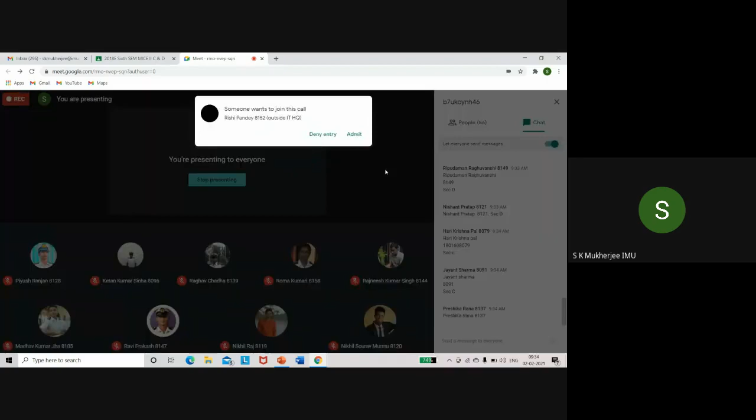What is more strict is getting placements. They are being so tough on the boys, unbelievably tough, and they almost tell you they don't want to take boys. It's like that, because the whole process of putting a boy on the ship and taking off somebody from the ship has become very, very tedious and very expensive for the company also. 14 days quarantine - during that quarantine he will have to be paid, he will have to be taken care of, and any medical test that has to be done at the company cost.

So these things are very costly for the shipping company. So they are trying to prolong the people who are on the ship, so that the stretch of time that a seafarer does is much longer, so ultimately the cost comes down. So they are finding all the means of cost cutting. So in the process, there are delays of getting on the ship, there are delays of getting off the ship.

And the funny part is those who are on the ship, they are desperate to get off the ship, and those who are on shore, they are desperate to get on the ship. It's a very funny situation - with the boys who want to get on the ship, they can't get, and those who want to get off the ship, they can't get off.

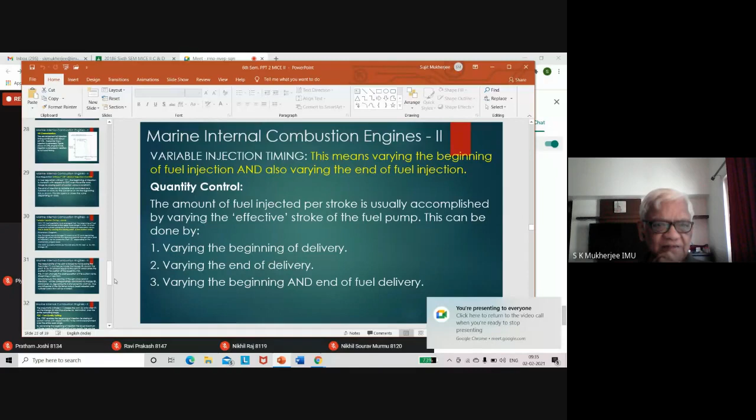So we were on page 33, as he says. Yeah, this was the diagram.

This was the diagram to show you how variable injection timing was achieved on the Sulzer valve control type of pumps. In the variable injection timing, you need to vary the beginning of injection as much as vary the end of injection. Varying the beginning of injection is the time at which the fuel is injected, and varying the end of injection is the quantity of fuel that is being delivered for the injection.

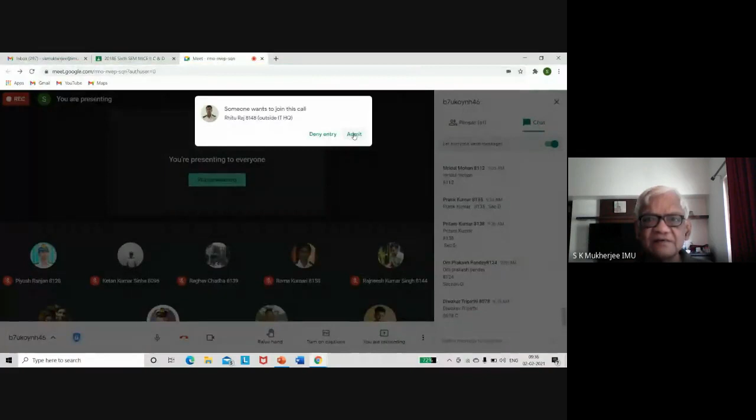So these are the two main issues. I will show you a diagram, which I think is a simpler diagram. Let's make it a little bigger so that you can see it better. Now here it is.

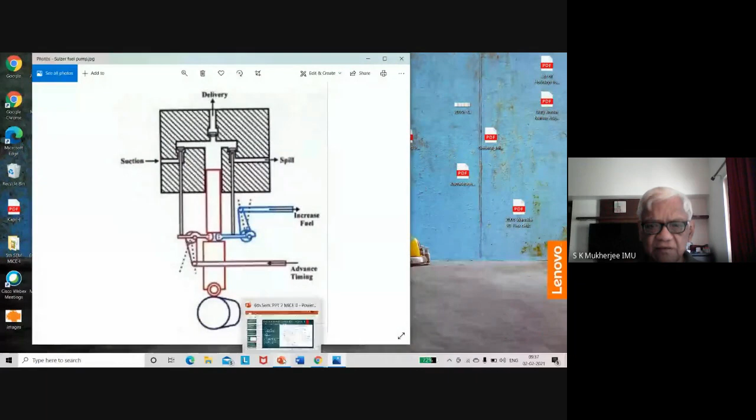Okay, some fellows coming to the class. Indrajit Moitro, he's always late. It is 9:37. Another 3 minutes, and I can't keep waiting for you fellows.

So, where was that diagram? It caused me a lot of confusion. Yeah, this is the diagram which I took from the net, but it is very elementary in its display. See, at the beginning, the suction valve is on the left side, and the spill valve is on the right side.

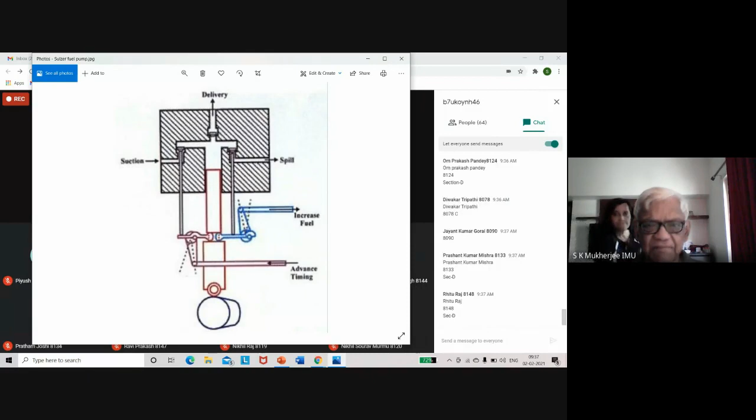Divya Prakash. Oh, who's this fellow? Just a second. Hello, Divya Prakash. Yes, what is it? For what? Laurel, so I have already sent all the names that have gone.

See what is wrong and right. Don't send me wrong lists because I will forward the wrong lists. I don't have.

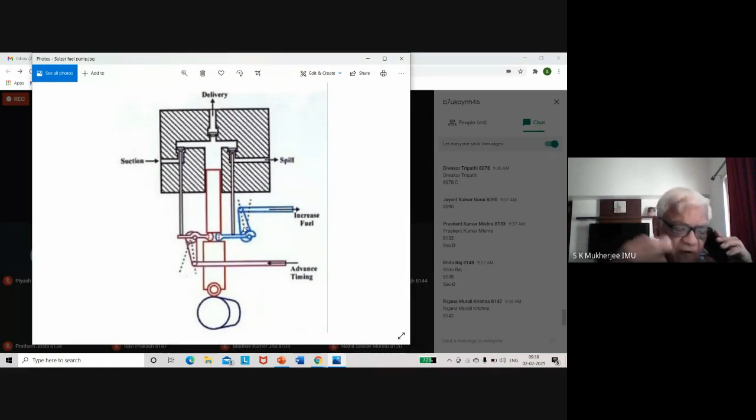See, it's the placement committee that is sending me the list, and I have to trust the placement committee. You all make a mess over there - it means I also make a mess. And now I have forwarded already to Laurel Ship Management, and it is up to them now. Whatever they decide, I have to abide by that.

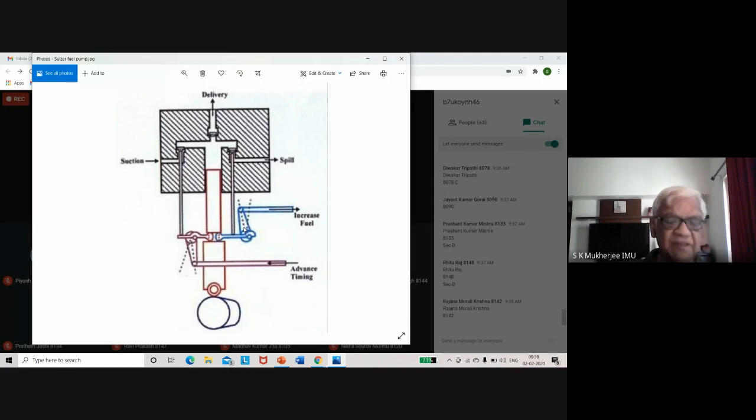They send all the - see, your placement committee has to be very, very efficient. They make a mistake means I also make a mistake. You send me a wrong list, I forward that wrong list. I don't have the scope to inspect that list in detail.

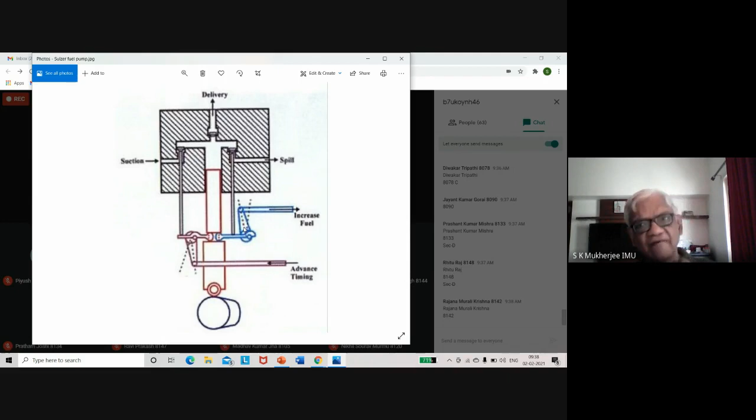That is why you have a placement committee which makes these lists, which identifies the boys who are going to be provided an opportunity. So you have to be a little serious about this. Don't send random lists and think your job is done, and then realize you have made mistakes.

Because what list I get, I have to trust the placement committee. And based on that, I send it to the company. And I can't keep telling the company, sorry, I have made a mistake, please correct this. Again after some time, no, that list was also a mistake and I have to amend that list. Where does it leave us?

What sort of institution are we if we keep making mistakes and telling the company it is not right, please amend the list? So once you send a list, it is final. Don't ask me to keep amending my statements to the shipping company. I lose respect, the whole institution loses respect.

And more than that, your boys become unreliable. All the students become unreliable. So be sure that the placement committee, when it does a job, does it very, very thoroughly.

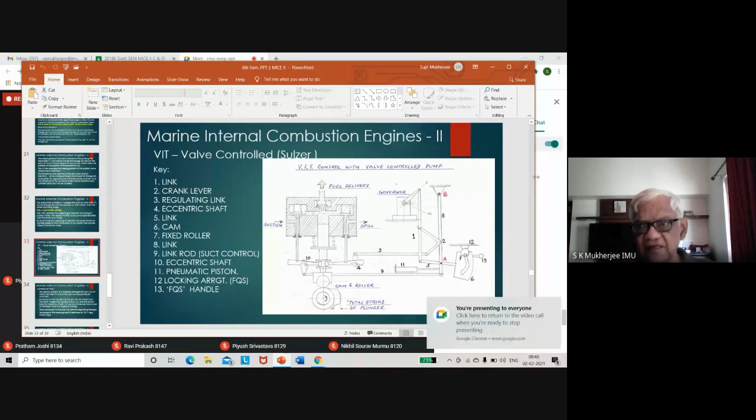Because what the placement committee gives me is what I forward to the shipping companies. And my interaction with the shipping company has to be at a certain level where there is trust. And if this level of trust is not there, they will stop coming to campus. It is very, very important, which some of you don't seem to realize.

They keep making mistakes, keep sending whatever they feel like, and then realize there's a mistake. So anyway, that is another point. Let's get back to our subject.

So I was explaining to you how variable injection timing can be achieved by adjusting the beginning of injection as well as the end of injection. So here you have a diagram of the same pump that you saw earlier. In the earlier diagram, you had the suction side fulcrum in a fixed position, whereas the spill side fulcrum was movable, thereby changing the timing at which the spill valve would open and thereby controlling the quantity of fuel being delivered. So this is not enough to ensure the best response from an engine in terms of fuel economy.

So what we have now is the fulcrum of the suction valve opening is also changed as much as the spill valve. And this is achieved by the governor through one arm here.

Okay, now if you have a look at the diagram, let's follow this diagram. I have the procedure also written down for your convenience when you happen to read it. First, let me explain to you firsthand how this leverage mechanism works.

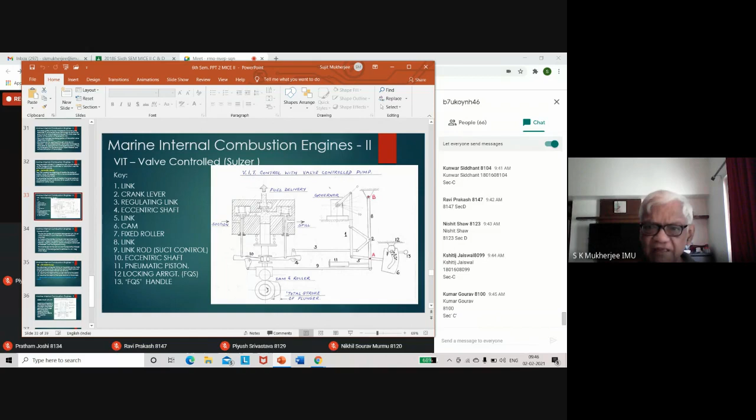In other words, the pin will move only in the slot, but the pin is fixed and the cam is moving upwards. So to follow the slot, the whole cam is going to move towards the left.

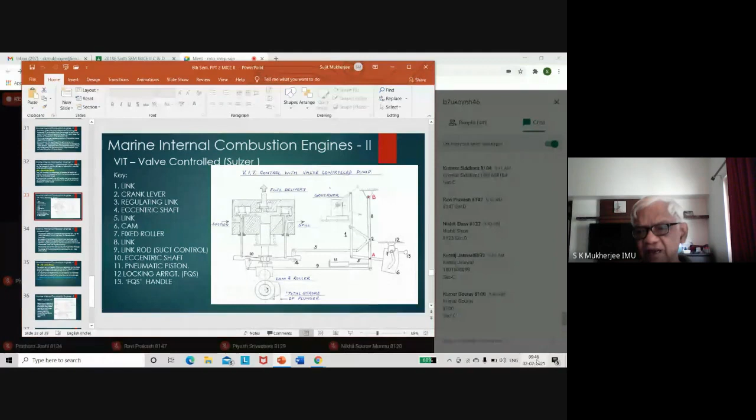No, sorry, I will not admit him. He's coming at 9:45, 9:46. No admission for this fellow. Who is this? Hasib Ali. No admission, not allowed, okay.

So when this cam moves upwards because of the force of the lever down over here, it will try to follow this slot. So this pin will actually push the cam to this side because the pin is fixed, the pin will not move, but the cam is moving upward.

So the tendency of the cam will be to move towards the left. If it moves towards the left, it means it will be pushing at the point where the hinge is, at B, and it will rotate. So the whole lever number 8 is going to move towards the left at the bottom while it is hinged at point B. Once it moves towards the left, it is going to move the eccentric at 10, thereby controlling the fulcrum which operates the suction valve.

So you see, with one movement of the governor arm, your spill valve is also controlled and your suction valve is also controlled. That means the opening and closing of the spill valve and suction valve are both controlled by the movement of the governor. So these are the functions of the levers.

You also have a pneumatic piston over here. This pneumatic piston keeps a pressure on this link number 8. Why? To keep it steadily fixed in one place. Otherwise, there will be some amount of rattle - it will sit moving around wherever there are clearances along the pins and hinges, it will tend to move about.

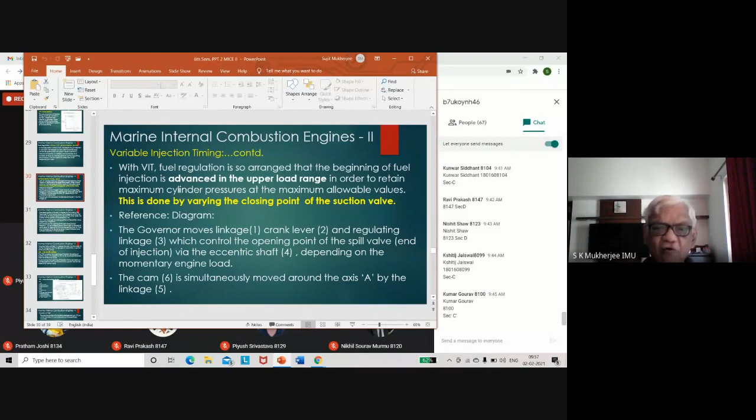So, in reference to that diagram which I showed you just now, you remember the governor moves linkage 1, that is that vertical link. And that vertical link was moving the L-shaped link, which was crank lever 2. And then regulating linkage number 3, which was controlling the eccentric for the spill valve. So 1, 2, and 3 are the three levers which control the spill valve, via the eccentric shaft 4, depending on the momentary engine load, whatever load is there at that point of time.

Okay, now because of this movement, cam 6, which is that rectangular plate like a cam, is simultaneously moved around the axis A by linkage 5. Moment lever 1 goes down, because it is hinged to linkage number 5, it will swivel. And because it swivels, the cam will go upwards, moved around the axis A by linkage 5.

Here is the diagram again. The moment number 1 is moved downward, it will initially move the L-shaped lever to cause link number 3 to operate the fulcrum of the eccentric to move your spill valve. Simultaneously, lever 5 will move downwards to cause the cam to move upwards because it is hinged at A.

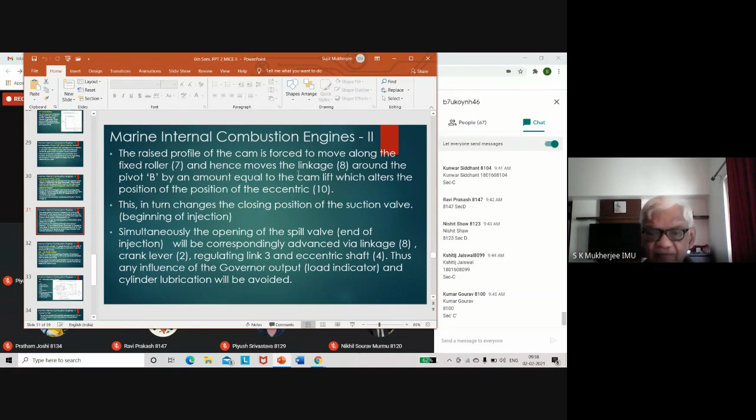Okay, so, because it is hinged at A, linkage 5. Next is the raised profile of the cam. What is the raised profile of the cam? You see that slot over there has a raised portion in the middle of the slot.

This raised profile of the cam is forced to move along the fixed roller 7 and hence move linkage 8 around the pivot B by an amount equal to cam lift, which alters the position of the eccentric 10.

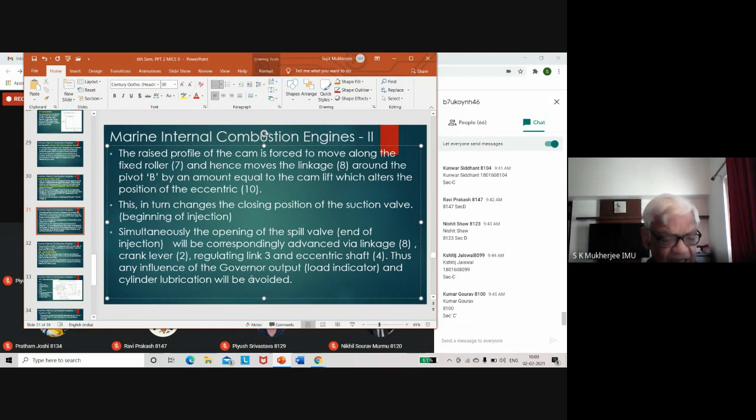Okay, that is the suction valve. This in turn changes the closing position of the suction valve, that is the beginning of injection. Simultaneously, the opening of the spill valve, end of injection, will be correspondingly advanced via linkage 8. You see, if you advance the suction valve, the linkages are so connected that even the spill valve will be advanced in its closure. So the entire process of advancing is done at the higher load range.

So if you remember that circular diagram showing the timing diagram of a two-stroke engine, which says 5 degrees before TDC fuel injection commences, 15 degrees after TDC injection stops. Now, if I advance this 5 degrees to 8 degrees, I will have to advance the 15-degree cutoff line to 12 degrees.

So from 8 degrees to 12 degrees after will be the injection period for full load condition, because the quantity of fuel ultimately being delivered has to be the same at full load. Only thing, the whole timing has been changed from 5 degrees and 15 degrees to 8 degrees and 12 degrees. The duration for which the fuel is delivered is the same as per the crank angle.

Okay, so that is what he is meaning here. Simultaneously, the opening of the spill valve, which is end of injection, will be correspondingly advanced via linkage 8, crank lever 2, regulating link 3, and eccentric shaft 4. Thus, any influence on governor output, load indicator, and cylinder lubrication will be avoided.

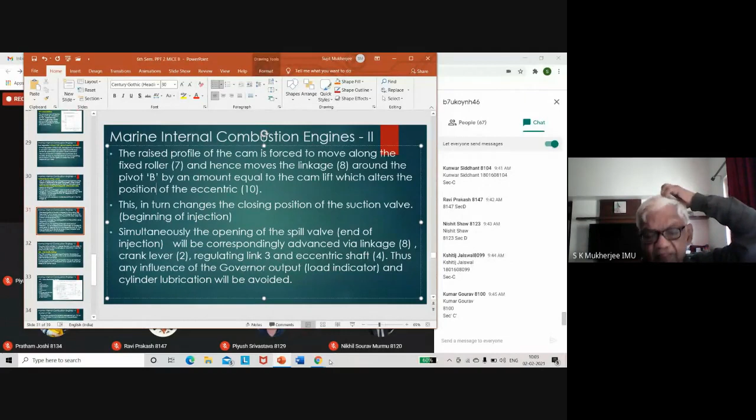So if I were to ask you a question, let me put this up as a question. Suppose the ship is fully loaded and it is running at 100 RPM. The propeller is running at 100 RPM and it is going on its voyage. It is definitely, something is burning.

I think they are making toasts in the kitchen.

Anyway, so what I'm saying is, suppose the ship is loaded and its propeller is running at 100 RPM, and it is consuming a substantial quantity of fuel, isn't it? The piston is moving in the cylinder liner at 100 RPM, at a rate relevant to 100 RPM. There is cylinder oil being fed into the cylinders for lubricating the piston and the liner at a certain rate. Okay, at 100 RPM, and the ship is loaded and it is moving.

Now, when the ship reaches the port and it discharges all the cargo and it is on ballast, that means it is as good as empty. But to keep the ship stability, you fill up some tanks with water so the ship goes down a little bit and it is stable. That is the whole idea of ballasting a ship. So now that ship is going to return or go to our next port, and it is again going at 100 RPM of the propeller, but it is empty.

Piston movement is the same speed because it is running at 100 RPM. So Kumar Gaurav, tell me, will the quantity of cylinder oil being consumed be less or more, or will it be the same or different? He doesn't know.

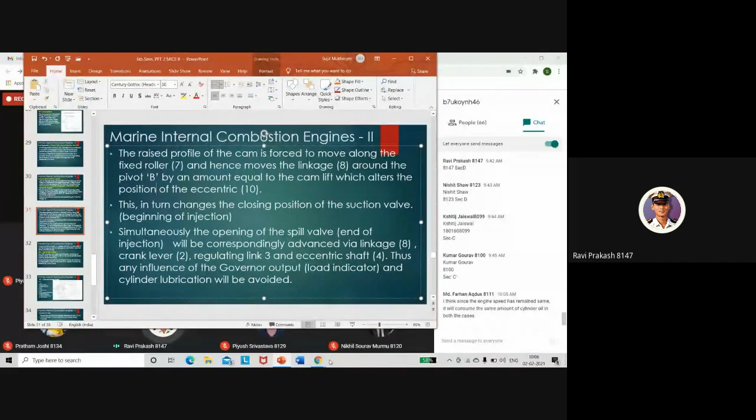Now this is the mistake. I will not say 90%, but a large percentage of the boys make this mistake. No, it will not be the same. You see, cylinder lubrication, why is it provided? For mainly two reasons. One is the frictional condition has to be reduced, so you provide lubricating oil. The second reason is the fuel oil, which has got some amount of sulfur.

So that sulfur quantity will vary depending on how much fuel you're burning for each stroke. When the ship is loaded, the load on the engine is more, which means the fuel being supplied will be much more as compared to the amount of fuel being delivered when the ship is empty. It is doing much more work carrying that whole cargo. It is doing very little work when it is empty.

So to push a heavy weight, you need more energy. To push a lightweight, you need less energy. So the quantity of fuel consumed during loaded condition will be much more than the quantity of fuel consumed when the ship is empty. That everybody understands, I hope.

Ravi? Yes, sir. Okay. Now, the quantity of lubricating oil supplied is for two reasons: one is to reduce the friction, and number two is to overcome the acidity that arises from the sulfur. If you burn more fuel, you generate more acid. And if you generate more acid, you need more alkali to neutralize that acid. So how can you give more or less alkali into the cylinder? By injecting more or less lubricating oil.

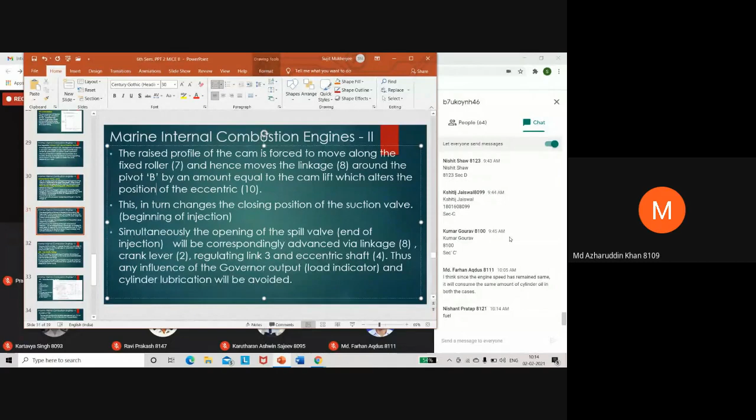No, over here we are not reducing NOx, we are running a normal engine. When you burn at low load it will condense? No. The reaction of H2 and O2? No. Combustion? Azharuddin Khan, you are near the answer.

You see, what is fuel? It is a hydrocarbon. So when this hydrocarbon burns, what does it give off? It basically gives out HC - hydrocarbon. So the C becomes CO2 or CO, carbon monoxide or carbon dioxide. And what happens to the H? H combines with the oxygen to form H2O.

So whenever fossil fuel is burned, whenever you burn wood or oil - any fossil fuel, which is a hydrocarbon - you're also generating water, but because of the heat involved it comes out as water vapor. This vapor is the source of water that combines with sulfur dioxide to form acid inside the combustion chamber. That is why this acid has to be neutralized, and it will react with the walls of the cylinder liner, the piston, the crown, all these parts.

So to avoid it, we use cylinder lubricating oil, which reduces friction between the liner and the piston rings, and also spreads a layer of alkali. This alkali, when it comes in contact with the acid, neutralizes it to form salt and water. Okay, Jaiswal has a question - once again please.

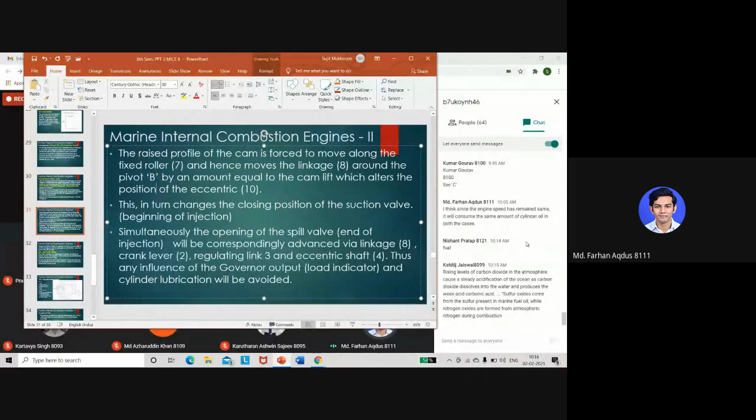This concept, when the fuel burns - fuel is basically a hydrocarbon, meaning there are hydrogen and carbon molecules within, let's say methane, so it has got CH4. The carbon burns into carbon dioxide or carbon monoxide. Hydrogen combines with oxygen to form H2O, that is water. This water cannot come out like water because it is hot, so it goes off as vapor.

So this vapor, when it mixes with sulfur dioxide gas, it forms sulfuric acid vapor, which reacts with the surface walls of the cylinder liner. But if the cylinder liner is coated with oil which has alkali in it, this alkali and this acid, when they react, will form salt and water. But this water which is formed again is in the form of vapor. So what goes out from the funnel is actually vapor and gases.

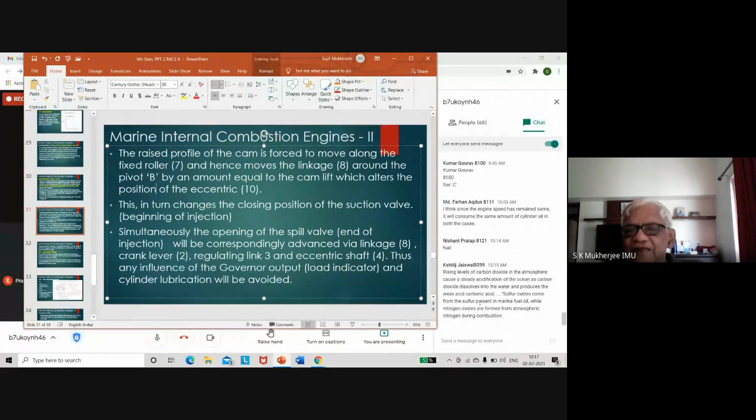Rising levels of carbon dioxide in the atmosphere cause steady acidification. Dissolved in water it produces the weak acid, carbonic acid. Sulfur oxide comes from the sulfur present in the fuel oil. Carbon dioxide, nitrogen dioxide, sulfur dioxide - this is what is killing us, and that is why the whole planet is under a lot of stress. Kshitij Jaiswal has brought out the real core of all our universal problems. We are killing ourselves, and that is why we have to get rid of using fossil fuels.

And if you see Elon Musk, he is one of the champions in the world. He's going to be a big hero, so he is going to do away with fossil fuels. And every attempt is being made to reduce our dependency on fossil fuels.

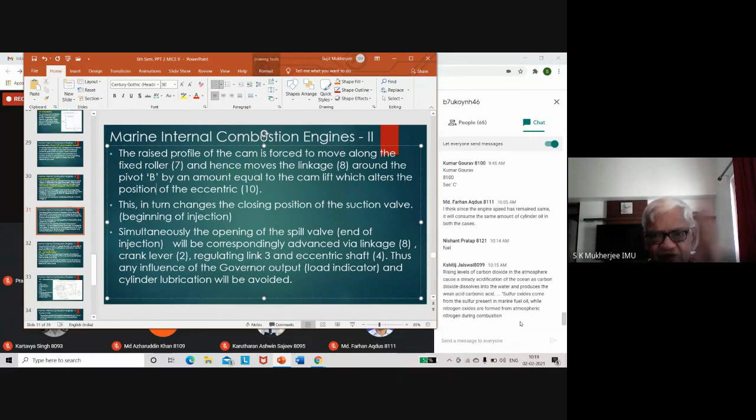Maybe you boys can think of some ways to avoid using carbon. Carbon is the main problem - carbon footprint - it is causing damage to the entire planet. So this carbon should not be used for any combustion process. But all our fossil fuels are carbon - whether oil, wood, or coal, they all contain carbon. Once you burn carbon, you get carbon dioxide, and when discharged you get carbonic acid, as Jaiswal already told you. Similarly, nitrogen oxide gives nitric acid, and sulfur dioxide gives sulfuric acid. So all these acids will ultimately kill us, and we are killing ourselves gradually. It is called gradual suicide - we are committing suicide.

So the pressure is on to stop using fossil fuels and use alternative sources of energy like solar energy, or hydrogen as a source of energy. But to produce hydrogen, you have to burn fossil fuel, and then you use hydrogen thinking you're safe. But ultimately you've already done the damage by burning fossil fuel to generate the hydrogen. That also has to be stopped.

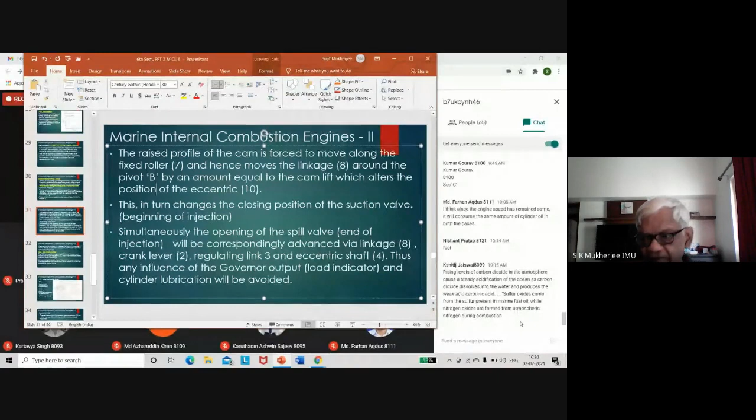Anyway, we are going off the topic. Let us finish our subject, the next chapter is coming up soon. Jaiswal, now don't change the topic, otherwise we will not finish our syllabus. Okay, where were we? We went off topic. I hope you have understood the last point, sir.

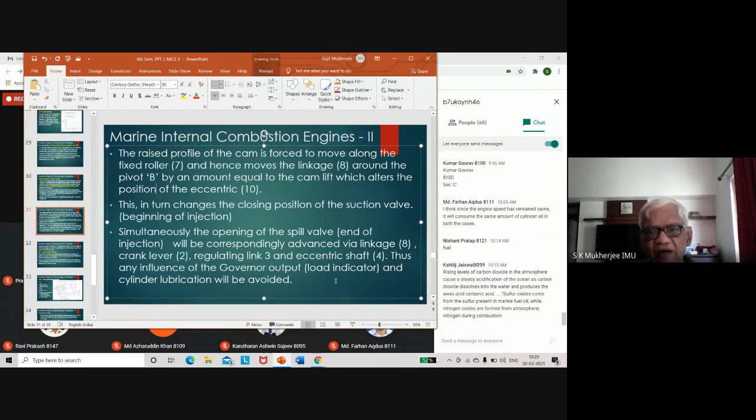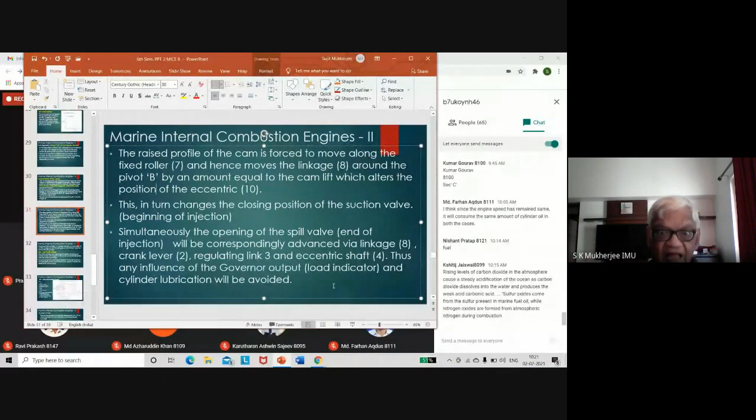Simultaneously, the opening of the spill valve end of injection will be correspondingly advanced via linkage 8, crank lever 2, regulating link 3, and eccentric shaft 4. Thus any influence on the governor output, load indicator, and cylinder lubrication will be avoided, so the load indicator remains in a steady position though the injection timing has changed. That load indicator is a lever which ultimately controls the quantity of cylinder lubrication also. So though injection has been advanced or retarded, cylinder lubrication remains static as required for the quantity of fuel burned on every stroke of the engine. This will become clearer when we cover cylinder lubrication.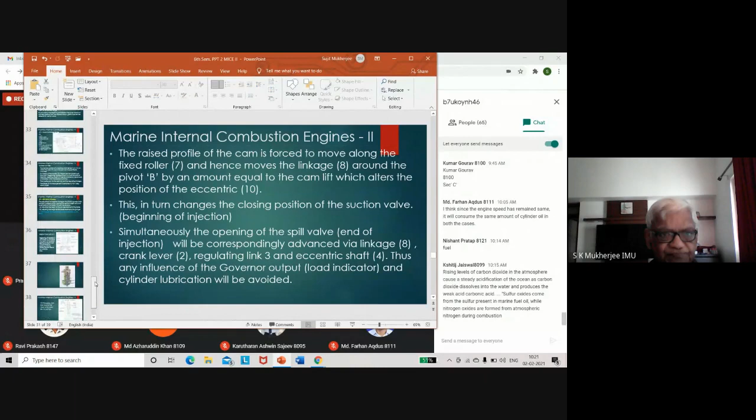Next, the pneumatic cylinder presses on cam 6 onto roller 7 via linkage 8, and thus ensures no lost motion over the entire actuating angle - that means it doesn't go rattling from side to side.

Okay, that is the purpose of that pneumatic cylinder with the pneumatic piston inside. Next, what we have is called the fuel quality setting. And this fuel quality setting has everything to do with that lever number 13.

Fuel quality setting enables the beginning of injection, that means the closing of the suction valve, with respect to TDC, to be advanced or retarded over the entire load range. That means whatever the governor can do to advance the fuel injection, the fuel quality setting allows for additional advancement, and it is the prerogative of the chief engineer.

And that lever is actually locked with a lock and key. So the chief engineer has the sole propriety of further advancing the injection if he feels that the peak pressures are not coming up even at the reduced load condition. So he will try to get the maximum load even at the reduced fuel setting.

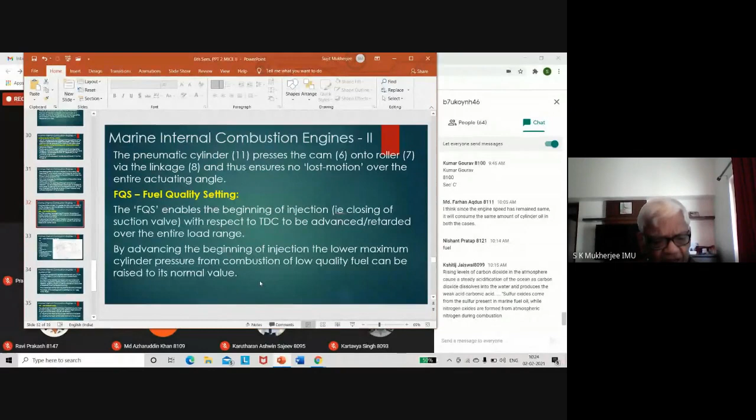The last condition which may cause the engine to perform badly, and very often that is the condition, because we are burning cheaper and cheaper fuel, is the quality of the fuel. And that quality of the fuel means how much you will be stressed out on the ship.

Okay, let's go to the next plate. So this was the diagram.

You will need to practice this diagram 2 or 3 times. But after you understood the working, drawing the diagram from memory is a breeze. That will be the case. I know some of you are capable, and you will definitely do it after one practice shot. You do it and you get it.

So in the exam, if you are asked to explain VIT and any jerk pump, on how VIT is achieved, then you can draw this diagram or you can draw a Bosch pump.

Let's read on what is the function of FQS. The device consists of a lockable arrangement pin 12 on which the roller 7 runs, and the cam 6 is eccentrically mounted.

Here, let's have a look at the diagram here. This is a locker arrangement which locks this cam position with the eccentric. So once it is locked, then you cannot move this handle.

I have not drawn the locking arrangement. I can't draw a lock and lever or lug over there, which is just two lugs with two holes in it, and you can put a lock over it. And it will allow that cam to be in a fixed condition.

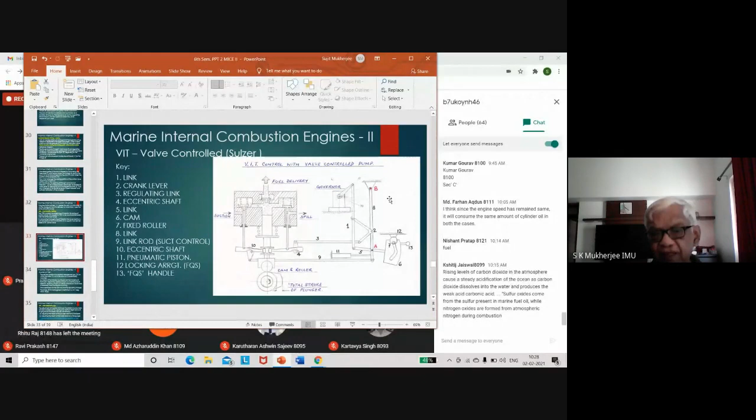So this locking arrangement is entirely the prerogative of the chief engineer. Once he fixes the cam so that it cannot be operated manually, the governor can still override it. When the governor does it, it can be done, but his personal intervention in advancing the cam is only under his lock and key, so only he can do it.

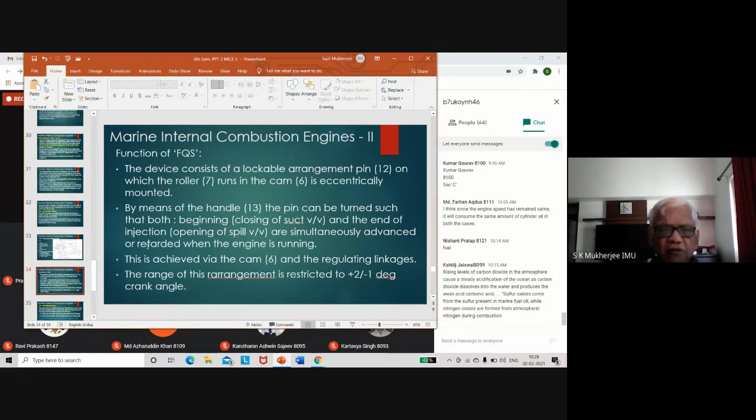So that is the fuel quality setting. By means of handle 13, the pin can be turned such that both the beginning, that is closing of the suction valve, and the end of injection, that is opening of the spill valve, are simultaneously advanced or retarded when the engine is running. In other words, the governor by itself advances both. Over and above this, it can also be done by this lever, handle number 13, which is capable of advancing the fuel injection and spill beyond what the governor can do.

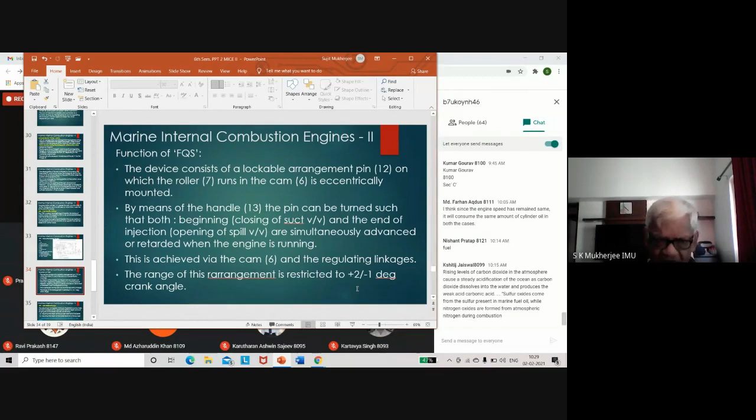This is achieved via cam 6 and the regulating linkages. The range of this arrangement is restricted to 2 degrees advance or 1 degree retardation. Either you advance by 2 degrees more than what the governor can do, or retard by 1 degree more than what the governor can do. That's what it means.

Now that was all about VIT with Sulzer pumps. Now what we are going into is VIT with the Bosch pumps. Remember with Bosch pumps, when the plunger was going up, once it covered the suction and the spill port, then the injection started.

Now, how do we change the beginning of injection? The end of injection is very easy to control because it is the rotary position of the plunger which changes the helix relative to the spill port, and that changes the moment when injection stops. But how do you change the beginning of injection? The adjustment of injection timing of the Bosch pump helix control is carried out by varying the relative height of the suction and spill ports of the barrel and the plunger edge, because the edge of the plunger top decides whether to cover or uncover the spill and suction ports.

So this can be done, number one, by adjusting the height of the plunger relative to the barrel. The plunger height can be changed by altering the height at the bottom. Some plungers have an additional extension part whose height can be reduced or increased, but it's a complicated process, so I will keep away from that. We will do the simpler one, which most pumps have: either adjusting the height of the plunger relative to the barrel, or adjusting the height of the barrel relative to the plunger.

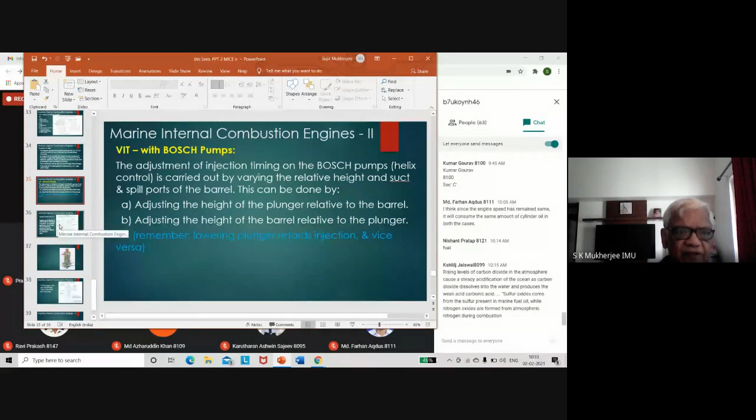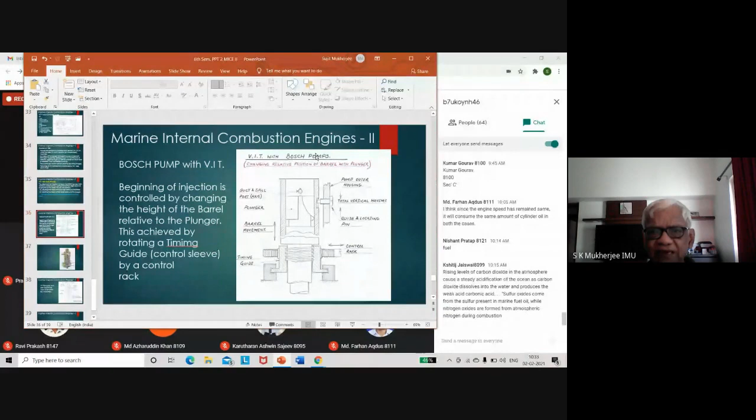Okay, let's move on. Now here is a diagram of how the Bosch pump barrel can be moved up and down. Let's have a look at this diagram. I'm going to make it a little bigger so everybody can see it better. Okay, I think this is much bigger now.

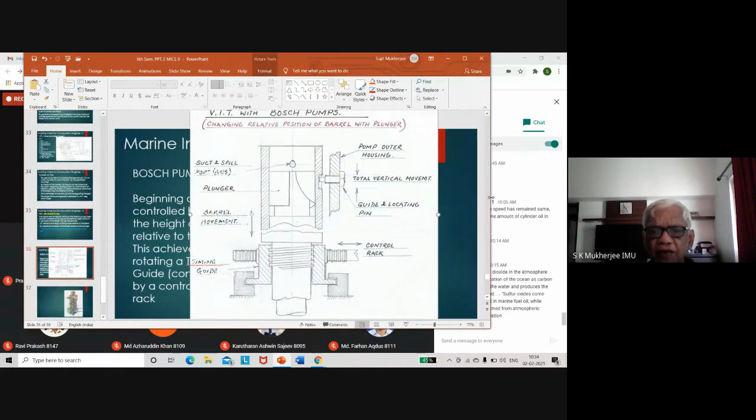Now what you see here is the plunger, and I've broken the pump in the middle over here, and the plunger is right in the middle, and this is the helix part of the plunger. I think everybody can recall the plunger, and this plunger goes right through the barrel, and this part is the next part of the plunger.

I have not shown the lower parts because they are not required over here, but this part is still the barrel. The barrel is sectioned over here, and once it is broken from here, this part is also the barrel, but it is the outside view of the barrel. This part is the sectional view of the barrel. You see, sectional view, outside view, isometric view.

You are lucky to have done your drawing in your previous semester. Otherwise, these concepts would be very difficult for the 2019 entry batch. They have not done drawing, but I have to show them drawings like this to make them understand any other subject. So your drawing subject was a very important subject for your concepts to be very clear anytime an engineering drawing is shown to you. You will be able to understand it very quickly.

So here you have the sectional view of the barrel, and if you see on the side there is that vertical slot, which is oval, and inside that slot you have a screw, a locating screw, or guide and locating pin, as he has called it. And this guide and locating pin is fitted onto the pump housing, and it goes through the housing into that slot over there.

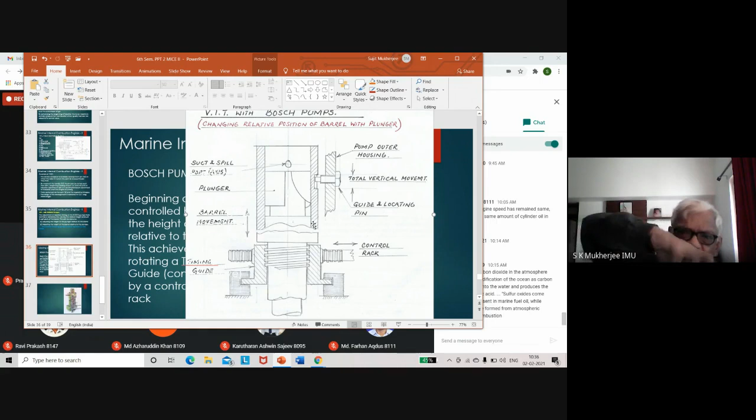See, the slot is a vertical slot, so the whole barrel can move up and down, but it cannot move in the rotary position because the width of that slot is the same as the diameter of the pin at this point. So it will not move in the rotary position, but it is capable of moving in the vertical position, by an amount equal to this slot length minus the diameter of this pin.

Over here, I have made a mistake by writing total vertical movement. It is not true, it is not the total vertical — this is the total slot height. This should have been total slot height. And the movement would be the total slot height minus the diameter of the pin at this section — that would be the total vertical movement. I have made a mistake here; you all don't make a mistake when you do the drawing. Next one, you write over here, total slot height. Not total vertical distance of movement.

Okay, now the plunger here. Now the barrel at the lower part has got square threads. Everybody knows what square helical threads are. And this square helical thread is fitted into a sleeve.

This is similar to the control sleeve, which operates or works the plunger of the same pump. It is similar, but to avoid confusion of the term, we have used the term timing guide — to divert from using the same term control sleeve, which is being used for the plunger. So this timing guide is fixed height-wise.

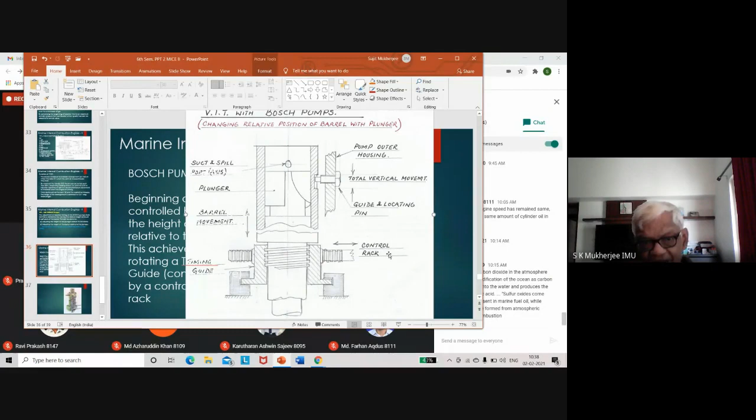And this rotation about the central axis will cause the threads in the barrel to move along the threads in the timing guide. This will cause the whole barrel to be lifted up or lowered down. So the movement of the rack is going to cause movement of the barrel up or down, by an amount equal to the difference allowed by this vertical slot minus the diameter of the pin over here.

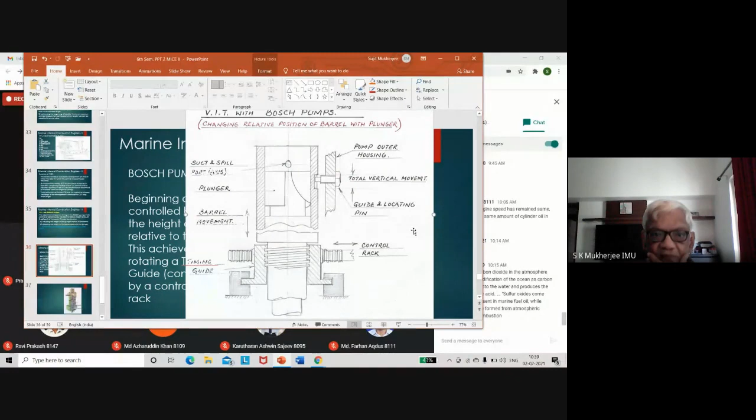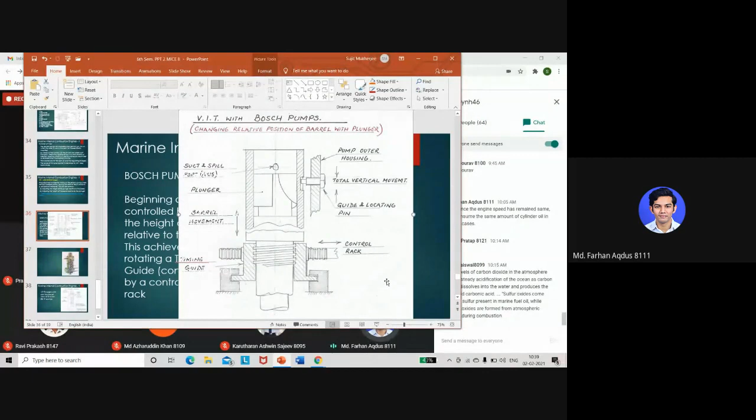Farhan, are you able to understand what I'm saying? Farhan has disappeared. No sir, I'm there. Any difficulty in understanding what I am saying? Sir, I'm trying, sir. Not able to understand in first go, but I'm trying. Okay, we'll go have another go at it.

Now, for the Bosch pump, it is important to have variable injection timing also. You have seen how Sulzer engines have their pumps controlling the suction and spill valves. Over here, we don't have valves. We have the suction and spill port whose position is being changed relative to the top of the plunger. When the plunger covers these ports, the oil on top is trapped. So when the plunger moves up again, it will squeeze that oil, and that oil under compression will be delivered to the fuel injector.

Now, if I change the position of this suction port and spill port a little higher, what will happen? That means the plunger will have to travel much more before it can cover the suction and spill ports. That means the beginning of injection will be delayed. Now, if I lower the suction and spill port a little more, that means the plunger will cover it much earlier, and injection will also be much earlier.

So the beginning of injection can be varied by changing the relative position of the suction and spill port to the plunger. And this is done by moving the barrel up and down. This movement up and down is achieved through a timing guide and threads on the barrel itself. The timing guide is kept fixed so that it does not move vertically, but is only capable of rotating around its central axis. And this timing guide has got threads on the inside, and the barrel has got threads on the outside at the lower region, and these are matched.

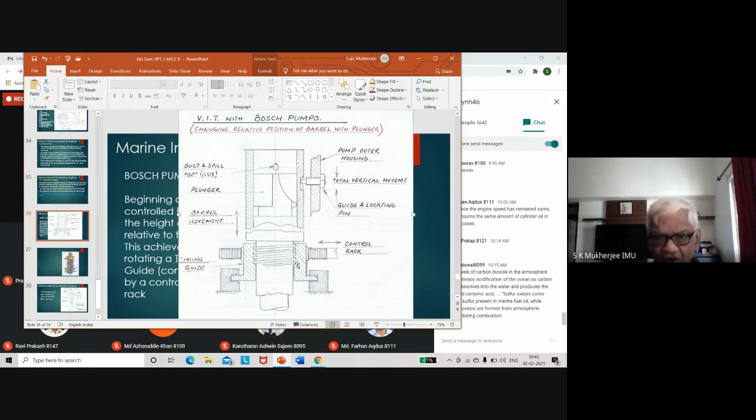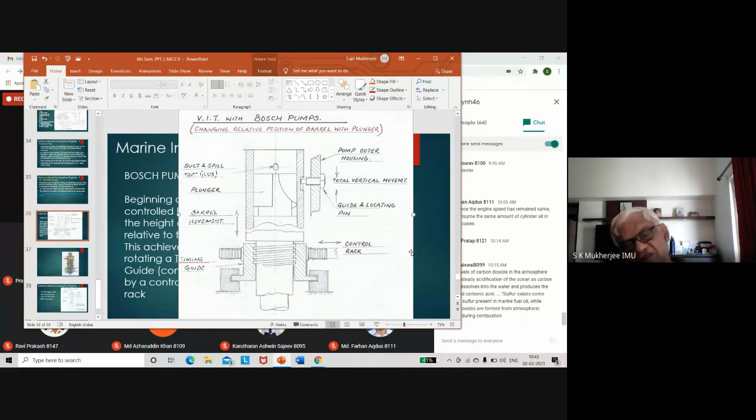So anyway, this pin over here restricts the barrel from rotating, so it allows the barrel to only move up and down while the timing guide rotates about the central axis by means of this control rack. So this control rack is again going to the governor linkages, similar to your Sulzer pump, where you saw link number 3 and link number 9. So this one here is the link number 9 that goes to the governor.

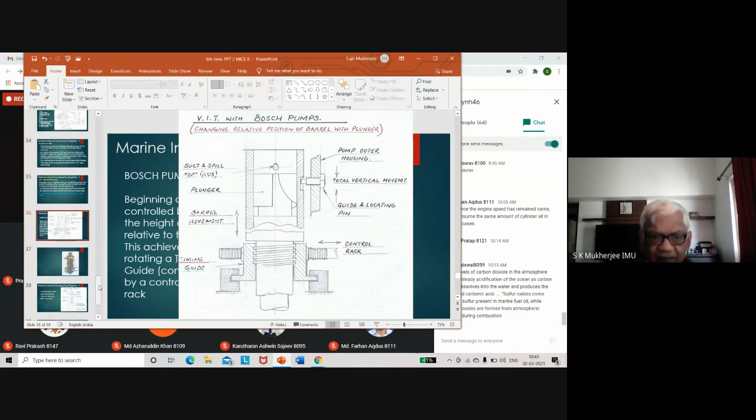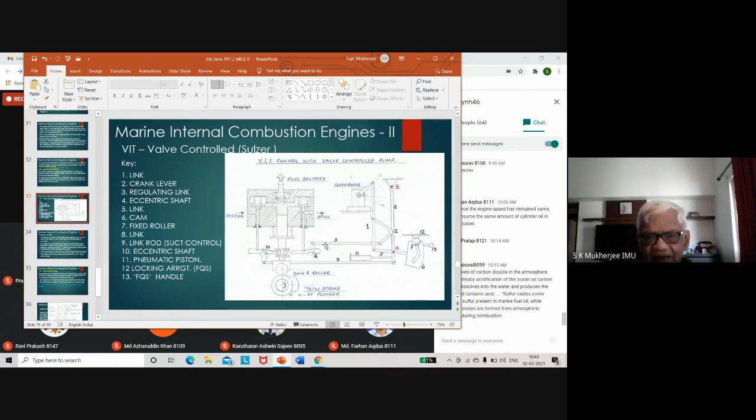If you see that diagram again - no, not this one, sorry. Yeah, link number 9 is controlling the suction valve and link number 3 is controlling the spill valve. Okay, so here in this case, this is going to control the suction and spill together, that means the controlling of the opening and closing of the suction valve. Whereas the control rack, which is operating the plunger, is controlling the spill port, that means the helix which opens the spill port. So you will have two racks.

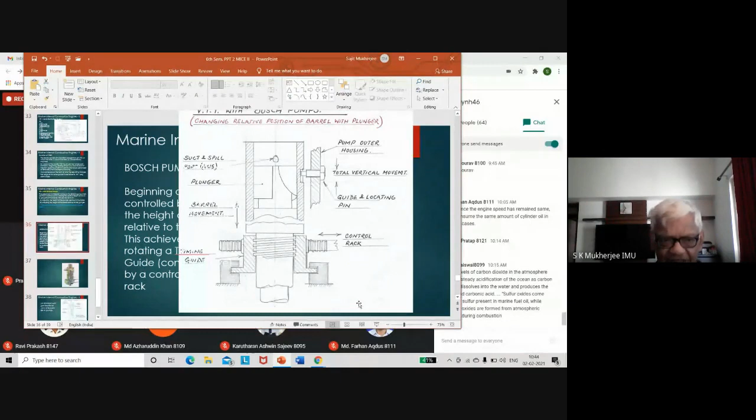So this one will be number 9 and this one will be number 3 because this controls the spill port opening and closure. Now I will show you a pump which is actually there, with the diagram, to make you more aware. This is your Bosch pump where the whole pump is shown.

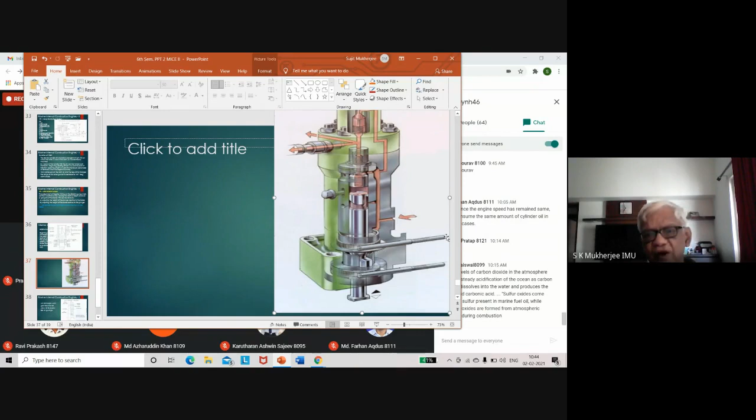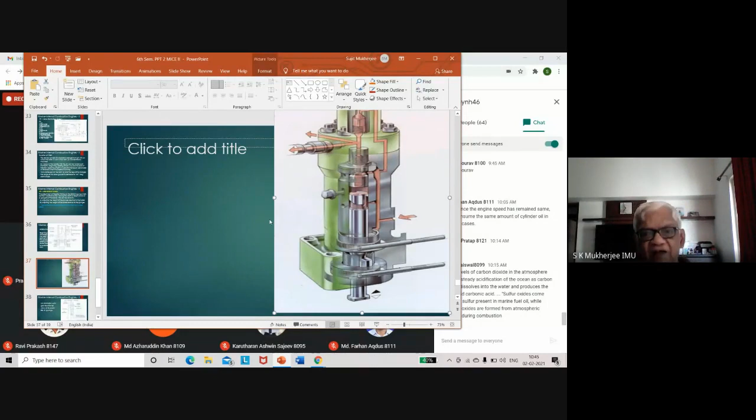This lever here controls your barrel movement, and this one controls your fuel rack movement. One lever controls the barrel, and the other ultimately controls the plunger. These two levers go to the governor, which automatically controls both simultaneously, advancing or retarding the fuel injection. This is just to show you.

You don't need to draw this. This is to give you a concept of how the Bosch fuel pump has got two control racks. One controls the plunger rotation, which operates the spill port, and the other operates the rise and drop of the barrel, which changes the position of the suction and spill port relative to the plunger.

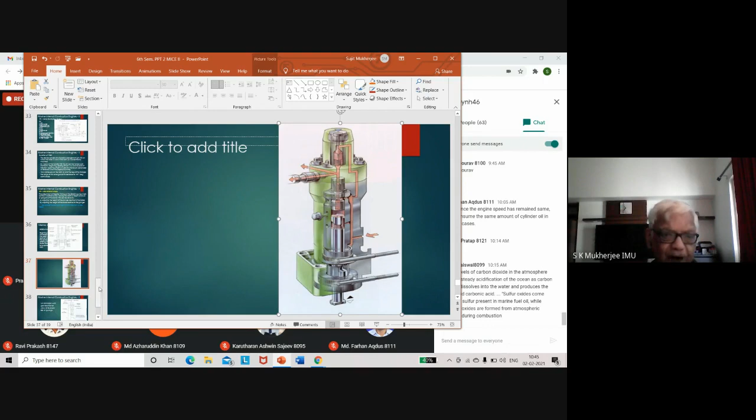This is an alternative diagram which is easier to draw in the examination if you are asked to show how variable injection timing is achieved by controlling beginning of injection and end of injection in the Bosch pump.

So you write over here, this is the diagram. This is actually half the diagram, and this is the plunger. This plunger is rotated by means of this control rack, which controls the end of injection, meaning the quantity of fuel. The fuel quantity is controlled by rotating the plunger, whereas the beginning of injection is controlled by raising and lowering the barrel.

This is the barrel over here, what you see. This is the housing, and this is the guide pin, which allows the barrel to move up and down. This is the timing guide, and this is the little rack. The movement of this rack causes the timing guide to rotate, and this rotation, with the helix or thread, causes the barrel to move up and down.

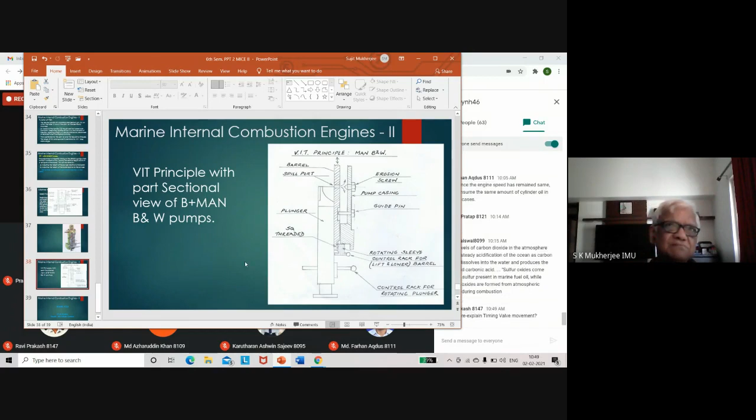I felt my entire 6 months effort on that boy was wasted. A jerk pump can be a Sulzer pump, what you've seen, or a Bosch pump that you can see. Both are called jerk pumps. Why are they called jerk pumps? Frankly, I don't know. Okay, I'll find out and tell you why they are called jerk pumps. That's the question I put to myself.

Can you re-explain timing valve movement? Which timing valve? There is no valve in the Bosch pump. Ravi, is it in the Sulzer or in the Bosch? Sir, in this timing valve, I had this question. You said in this two-stroke engine, in the timing diagram we observed, fuel injection takes place 5 degrees before TDC and continues up to 15 degrees after TDC. And if we modify it to 8 degrees before TDC and advance it to 12 degrees after TDC, how does that take place with this Bosch pump?

Now you have understood the beginning of injection can be varied by movement of this. Movement of the barrel will change the position at where the helix will cut off, giving cutting off much earlier, because this helix is what decides when the fuel is going to get cut off. If it starts the injection earlier, it will also cut off earlier. If it starts the injection later, it will also cut off later.

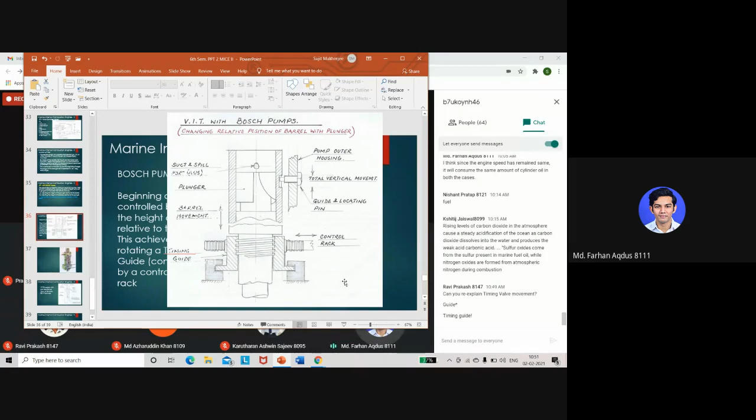Sir, but changing the timing entirely, we need to bring some fundamental changes in the pumps. So I wanted to know what changes take place that the timing changes. If you want to see now, I have given it a fixed position of 5 degrees and 15 degrees. Now if you want to change the fundamental position, you will have to change the cam. The cam at the bottom will have to be shifted.

So then you can have a fundamental change of, say, 4 degrees and 16 degrees. Now from that 4 degrees, you can do the advancing by 2 degrees to 6 degrees. And similarly, from 16 degrees, it will come to 14 degrees by means of rotating the control rack of the suction and the plunger.

Both. What you're talking about, fundamental change, means the initial setting on the engine. Suppose it is not 5 degrees, it is 4 degrees. You want to make it from 5 degrees to 4 degrees. Then you will have to change the position of the cam.

After setting the cam, then you have 4 degrees and 16 degrees fixed. Now you want to advance that with the load increase. Then that 4 degrees can become 6 degrees before TDC. And because it comes from 4 to 6 degrees, then it will come from 16 degrees to 14 degrees. That quantity will be the same. Are you understanding now? Yes, sir.

The cam position also has a role to play at what time the fuel injection will start, because it is the cam which is moving the entire plunger.

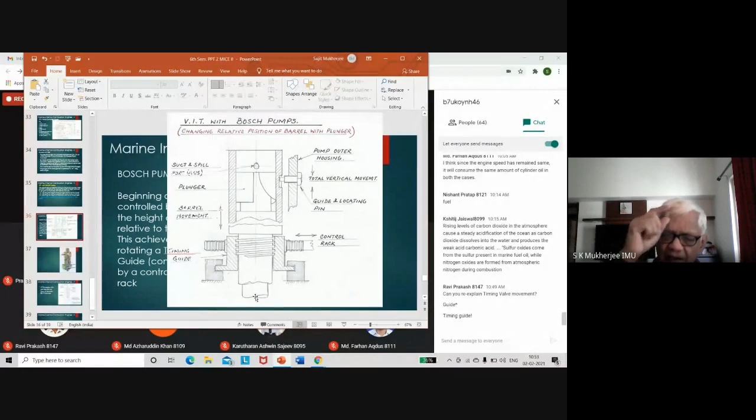Ravi Prakash wants to know about the timing guide. You see, it is the same thing as control sleeve. In this case, the control sleeve is being used to move the barrel up and down. In the other case, it was being used to change the rotary position of the plunger. The other control sleeve in the original Bosch pump, which did not have VIT, was simply changing the rotary position of the plunger to change the helical curve position relative to the spill port.

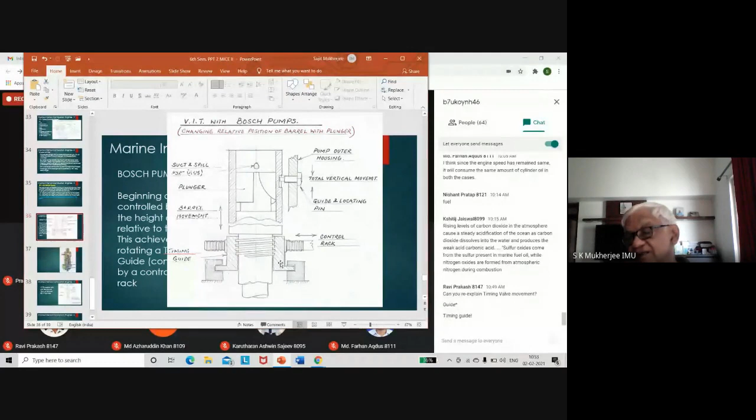So this one, instead of calling it control sleeve, we are calling it timing guide. It is doing the same function as the plunger - the plunger is rotated, but over here it is made to do vertical movement. The control rack in both the cases is simply rotating the two of them. One is the control sleeve which is being rotated, and over here, the timing guide is being rotated by the control rack. That's all. That is why we want to use a different name instead of calling this a control sleeve.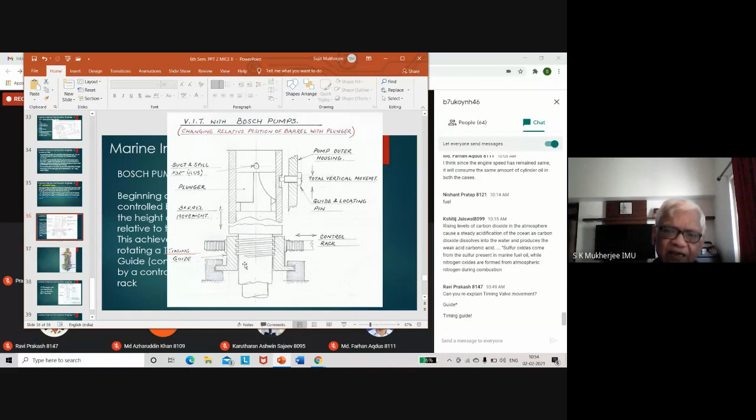It is also controlling. What is it controlling? It is controlling the height of the barrel. That is why I have termed it - and in fact, books have also termed it - as timing guide. It times the point at which beginning of injection is achieved.

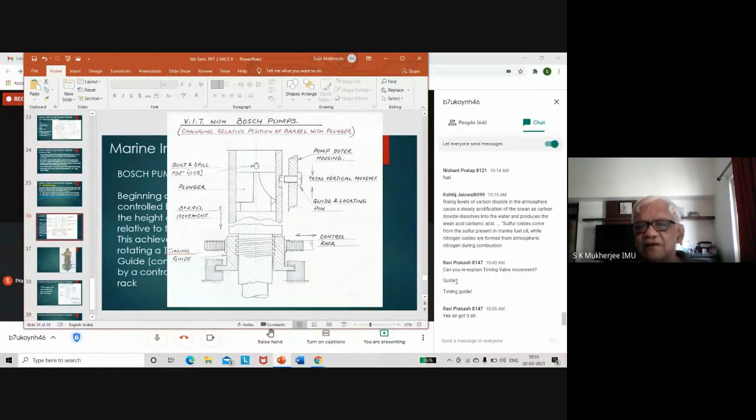Ravi Prakash, are you able to hear? Timing valve movement, you have asked for guide - timing guide movement. Yes, sir. Got it, sir. Okay, let's move on.

So this is your diagram, which is the Bosch pump. It's a little more complicated because it's got a puncture valve over here. This puncture valve is a valve which is not a very old construction. This puncture valve is incorporated in the fuel pump because you suddenly want to stop engines. All you have to do is open the puncture valve.

So the delivery after the plunger going to the injector, this is the one that is going to the injector. So the fuel delivery to the injector is from here, and that puncture valve will stop the fuel going to the injector and it will give it into a different passage. So that oil will go out from there and it will be released.

So the pressure above the plunger is released instantaneously, which means the engine will stop instantaneously. There have been problems earlier when some unit goes defective and you want to stop the engine, so you pull the lever on the governor to stop it. But the governor lever which operates the pump has multiple pins for each pump, and those pins get sheared off. If that shears off, the governor is useless.

Even if the governor moves its load indicator to 0, it doesn't mean the fuel racks will move to 0, because the link pin between the governor arm and the fuel racks has sheared off. This is not uncommon because nobody looks into that, and it is regularly being stressed right through the running of the engine. So over a period of time, a pin the diameter of a pencil gets sheared off, and that is controlling all the fuel pumps.

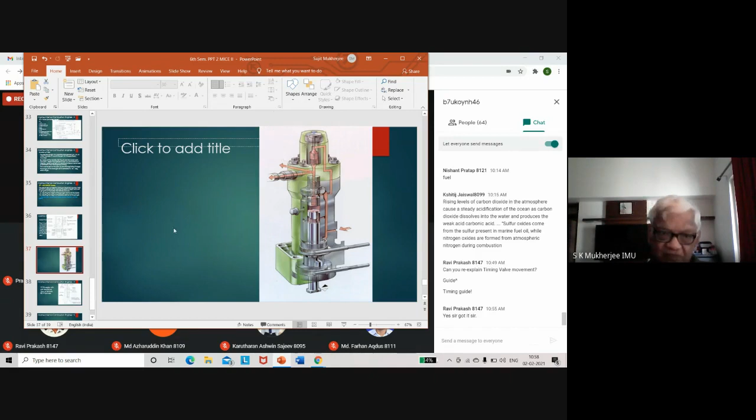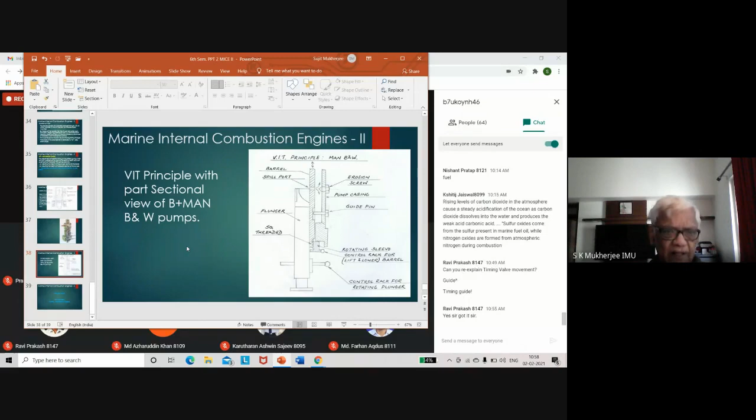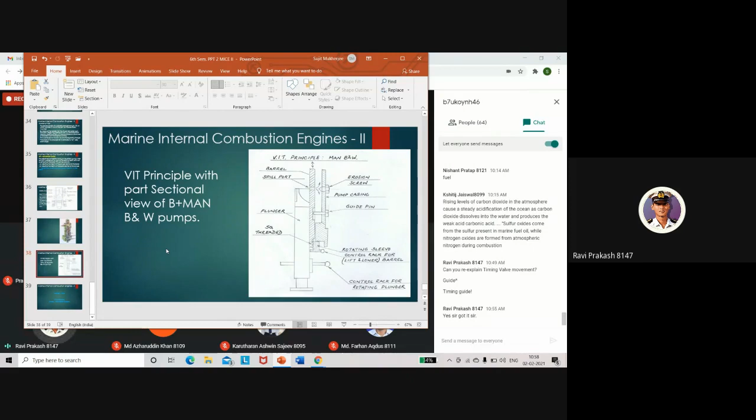Because the beginning of injection is the advancing of ignition, the starting of combustion, and the advancing of the end of injection, that is the spill valve, means controlling the quantity of fuel that is being delivered in the chamber. You cannot simply advance the beginning of injection and leave the spill valve in the same position. Then what happens? The quantity of fuel going in at that load will be too much. You have to regulate the quantity of fuel. Okay, this is what happens.

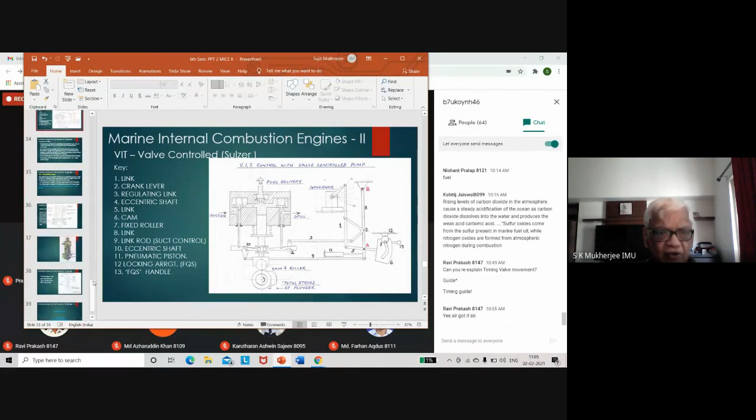Okay, that will be all for today. Next class we will start with the indicator diagrams, power calculations, etc. I'm still making out that PowerPoint, and the moment I finish, I will start on that.

Oh, today is don't go. Wait, I have something to say. Wednesday, Thursday, and Friday - sorry, Wednesday and Friday. Who has got classes on Wednesday and Friday? Section E and F and C and D.